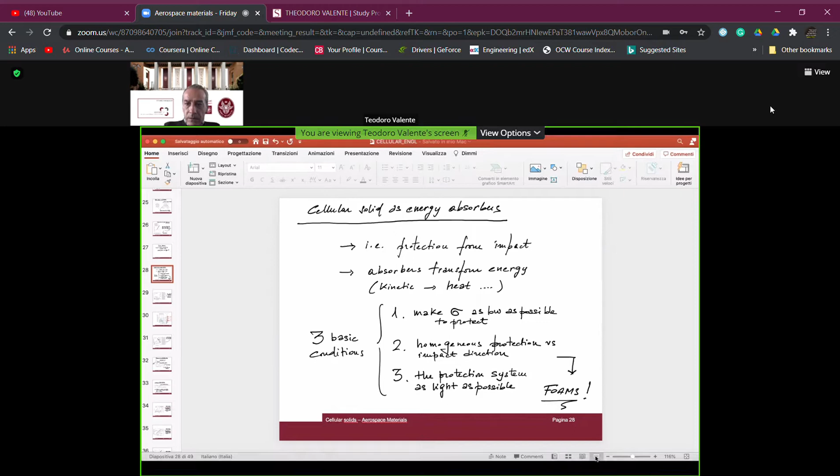And okay, so let's conclude the topic we are going to discuss related to cellular solids. We just started to talk about a possible application of this kind of material as energy absorbers. That means for protection, for example, from impact, and with the ability to transform absorbed energy, in this case kinetic energy, which is absorbed by the impacting mass, for example, to heat.

If we want to talk generally about the possibility to use a material as an energy absorber, we need to keep in mind three basic conditions which must be met. First of all, the structure, that is the material, must show a sort of homogeneous protection towards the impact direction, because we are not always in the condition to predict a defined impact direction. So this means that the behavior of the materials towards this kind of phenomena must be as homogeneous as possible. And this means that the microstructure of the material itself must not show, let me say, discontinuities, but must be the same in all directions. This is the first condition to be met.

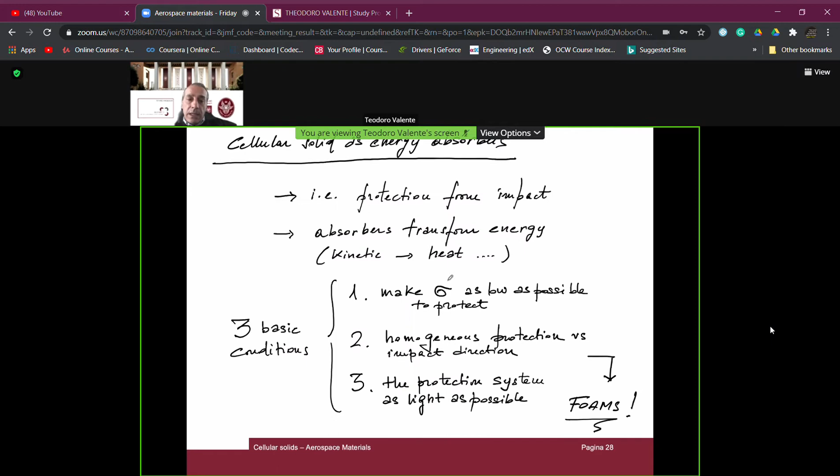And so we can match with this kind of materials also this condition, that is, make the stress transferred as low as possible. And thus all these three conditions, which are essential in order to identify materials suitable for energy absorbers, are matched by cellular solids. And this is a quite important and relevant field of application of this kind of materials. This is another example showing you, if you want to compare, the case of an elastic foam.

If you want to compare the energy absorbed per unit volume, remember that when we are talking about a stress-strain diagram, areas are energy, but they are energy per unit volume, okay? In the case of a fully dense elastic solid, and cellular materials having different values of density, like reported here, you see the top value is 0.3 according to our definition.

Well, if we are going to work by fixing the normalized peak stress, that is the maximum stress transferred, you see here, for example, the energy which can be absorbed by a fully dense, obviously elastic, solid. And then this energy is going to be increased when we move towards a higher value of mass density. But it's also very interesting, and most interesting I would say, having defined that the behavior of the cellular solid is much better than the fully dense elastic solid, to have a look here

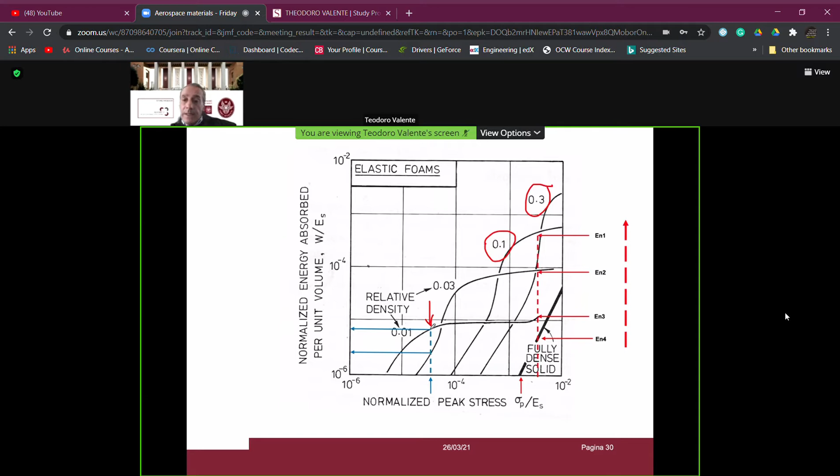to the blue line, for which we can see that we are able to transfer stresses to the background to be protected which are two orders of magnitude less than those we have in a fully dense elastic solid, by absorbing, for example, also higher values of energy. Thus, in this case, confirming what we have just said a minute ago.

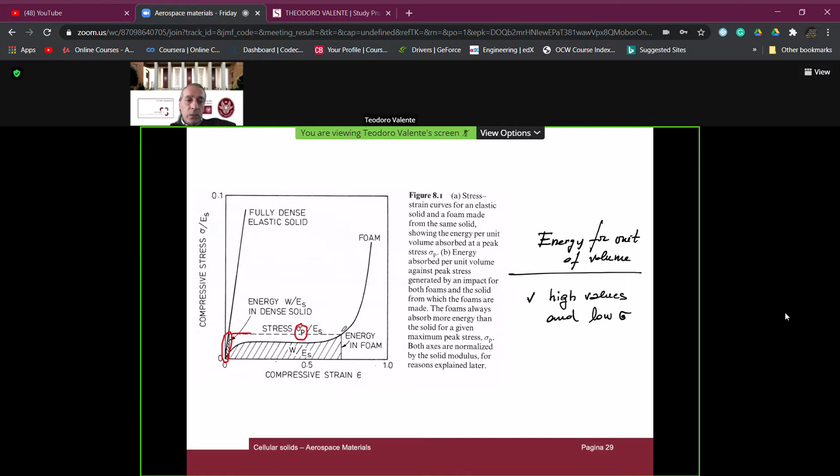Obviously, what is going to happen if we look to the stress-strain diagrams of the cellular solid is that these stress-strain diagrams for the same material can be parameterized, can have as parameter the mass density of the cellular solids. And if we are going to increase or decrease, depending on the point of view, the mass density of the cellular solids, we are also going to increase or decrease the maximum peak stress, which is that referred, for example, to the plateau, for which the stress is more or less, as we said last time, constant.

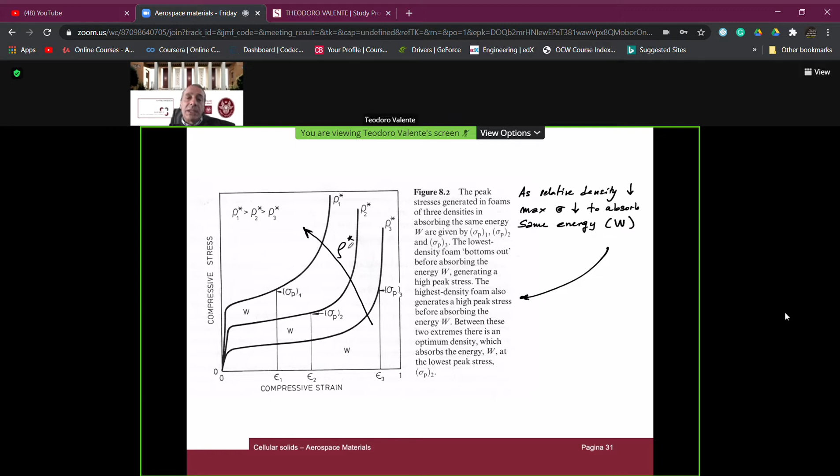Thus, the mass density is one of the design parameters in order to define properly, depending on the properties of the background, the maximum allowable stress when we use cellular materials for such kind of application. Are we able to calculate the energy per volume which is absorbed? Yes, the answer is yes, because that's just an integral of the diagram.

So this is the case, for example, for which we can define a constant value of the stress in the plateau. Then we have other contributions that can be added if we want to consider, in the case of open cells, also the work which is done by viscosity for fluid extraction when we have a compression applied on the material itself. And this is something which is very well known to you because it's related to fluid behavior,

as well as, if we want to define also the case of closed cells, like on these slides, we need to take into consideration not the fluid extraction, like in the case of the open cell, but the fluid compression inside the cells, having material not only on the edges but also on the faces. And also this is a work made by pressure: variation of pressure with reference to variation of volume, that is variation of deformation.

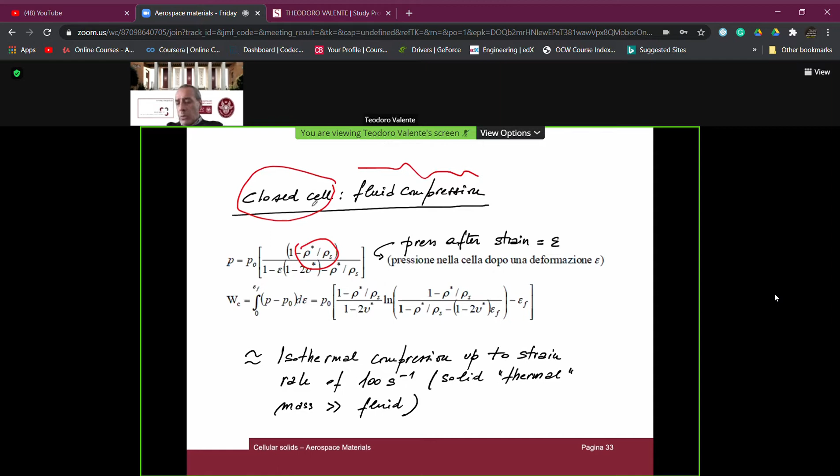And also in this case, we are able, very simply, if you know the geometry, obviously, and the geometry, I remind you, is linked to the ratio between the cellular solid density and the corresponding bulk material density, to make an analytical evaluation of the energy, remember, per unit volume, which can be absorbed, generally speaking, having a plateau, by considering if we want the work done by viscosity for fluid extraction or the work done for fluid compression in the case of closed cells. So we have all the analytic equations which let us make our calculation.

What is the procedure which is generally used in order to properly select, having defined a basic material, the mass density of the cellular solid which can match our design condition? Well, we have just said that the stress-strain diagrams are related to the mass density. As you see, when we increase the mass density in this way, we are going to increase the peak stress.

Another thing that we must consider is that the shape of this stress-strain diagram is not independent of the strain rate, since in this case we are discussing the impact behavior of the cellular solids.

So first of all, what is done, and this is able also to give to us as a result a graphic procedure, but if we want to make it analytically, we have the equation we have described before. We establish, or we analyze, depending on whether we have to do lab testing or we already have the data, the stress-strain diagram in compression, again, for a fixed value of the strain rate.

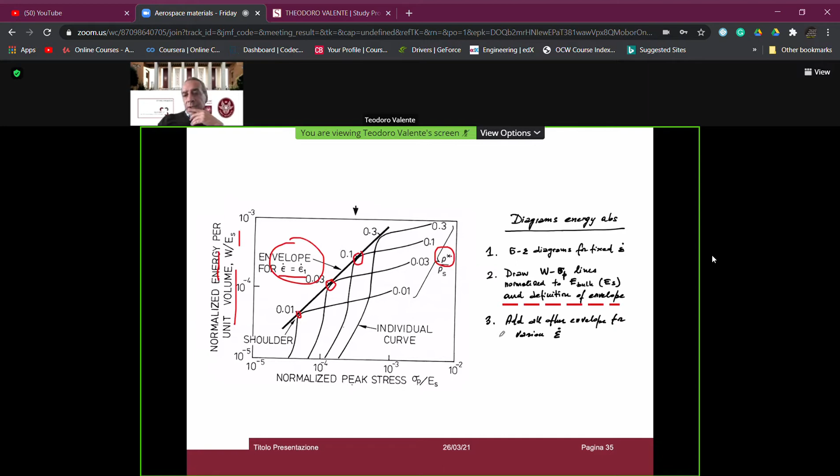Then we can move to the third step, because we have just described the first and second: we can add all the other envelopes for all the other values of strain rate. I mean, we have to repeat this procedure for another value of the strain rate, and so we can have this envelope, this is the first one, then the other envelope, this is the second one, and so on. Each one is related to a fixed value, as you see here, of the strain rate.

And then we have finished, because we have all three parameters on these diagrams, which let us define the mass density of the solid, depending on the normalized peak stress that we want and the energy per unit volume that we want to absorb. Again, I repeat, normalized to the bulk Young modulus, that is the Young modulus of the corresponding bulk material. And this is a graphical procedure.

Some of these graphs are reported for the most common cellular materials in specialized texts. So in some cases, we can use these diagrams directly to make our selection. That is, define the mass density of the cellular solid when we know that we have to absorb a certain quantity of energy for a defined value of strain rate with a maximum peak stress defined by design, which is the maximum stress considered allowable by the component, by the structure which must be protected.

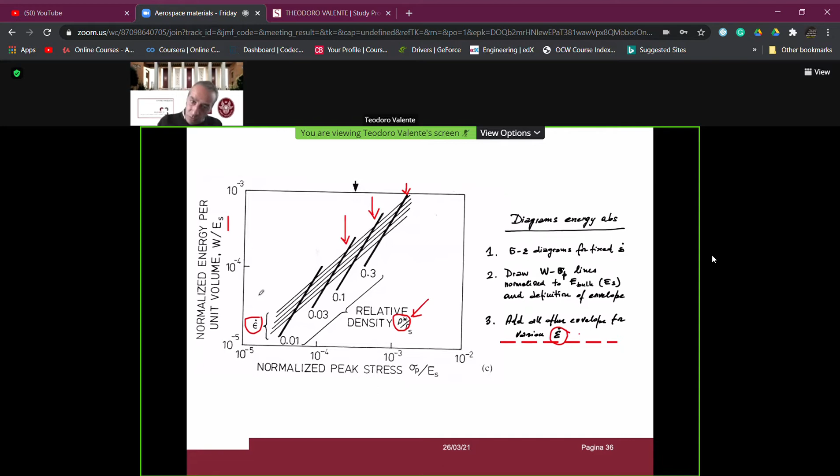Here you have some examples. This is related to some elastic foams, polyurethane or polyethylene, like in this case. And you see here, this is defined for this value of strain rate and for a defined value of temperature, because in many cases, especially for polymeric materials, temperature is able to activate different behavior. And these are the experimental data. This is the first envelope that we define, and this is the case of an elastic foam.

This is a case of a plastic foam, that is a cellular material for which we have to consider as peak stress the maximum stress for the yielding of the material itself. And thus we have final diagrams like those I showed to you. This is for polyurethane foams, elastomeric foams, and you see here, depending on the relative density and the value of the strain rate, we have the whole relationship between the energy which can be absorbed per unit volume and the corresponding peak stress.

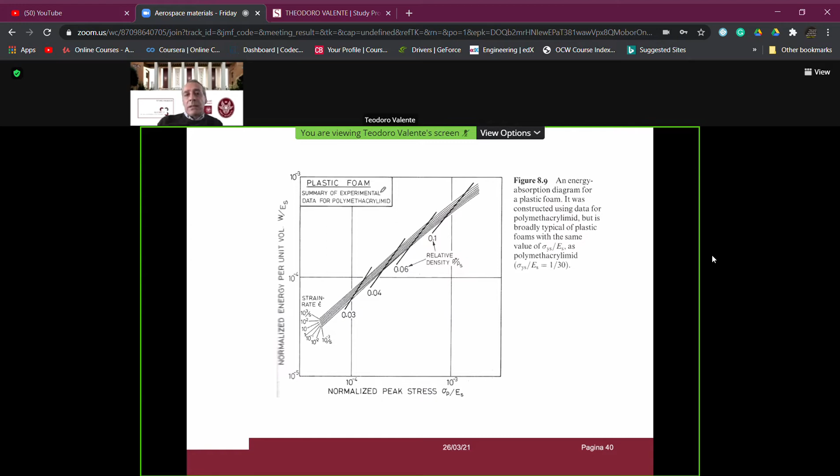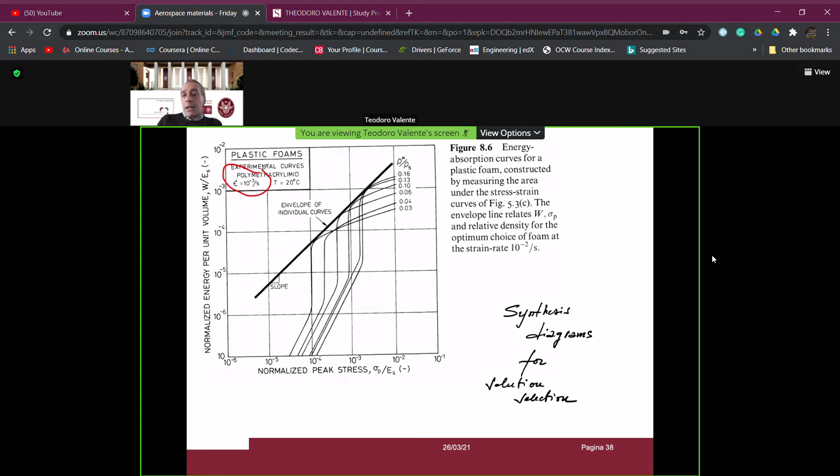And this is the case of the plastic foam related to the polymethacrylimid, which is the same material to which this diagram refers. Obviously, diagrams of this type have been done with different values, not only 10 to -2, of strain rate, with velocity, which is going to characterize the impact on the material itself.

Let's have a look very shortly if it works. What is going to happen here is not going to work. Of a demonstration. Why? Let me see. Oops, because I have a pen, perhaps it's for this. Yeah, a demonstration on how, also experimentally and visually, I would say, these kinds of materials are effective. Okay, let's have a look.

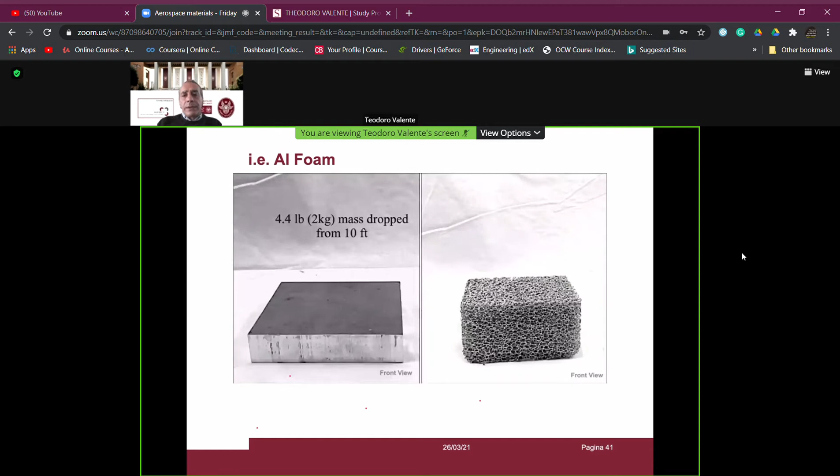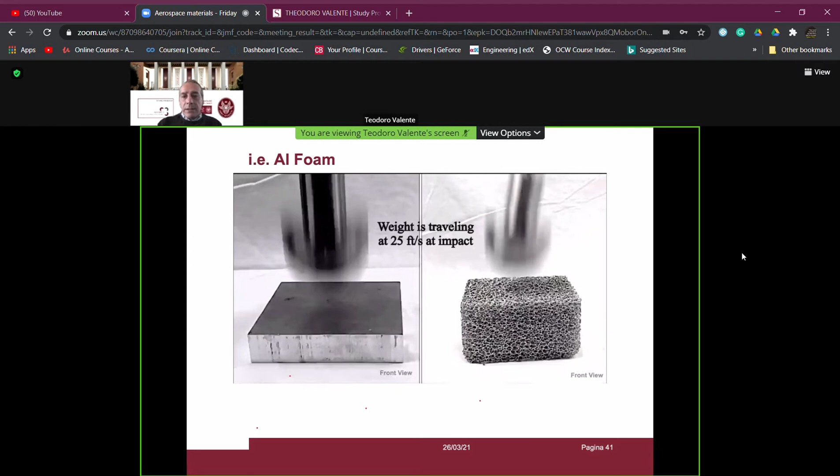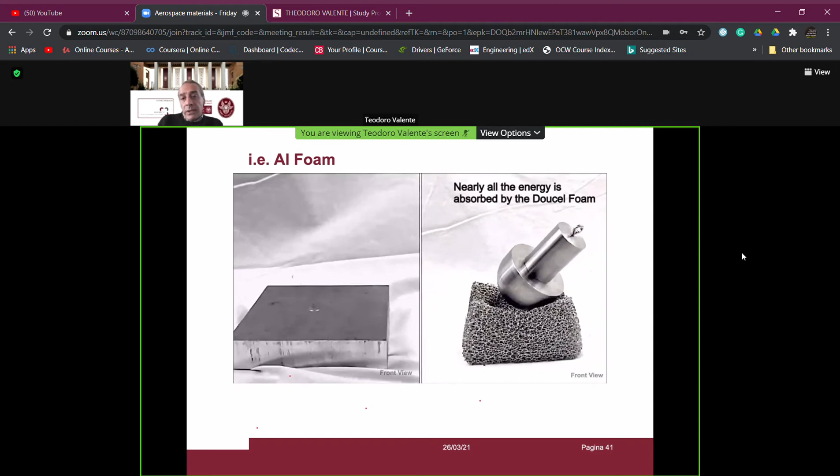That's the case of an aluminum foam compared with a solid aluminum, where we have a 2 kilogram mass impacting. You see, this is the behavior compared of the bulk on the left side and of the foam on the right side. In this case, we have defined the velocity, we have defined the mass of the impacting material, that is the energy, and you see that nearly all the energy is absorbed by the foam in the right case. Meanwhile, the solid aluminum block causes the impacting mass to bounce.

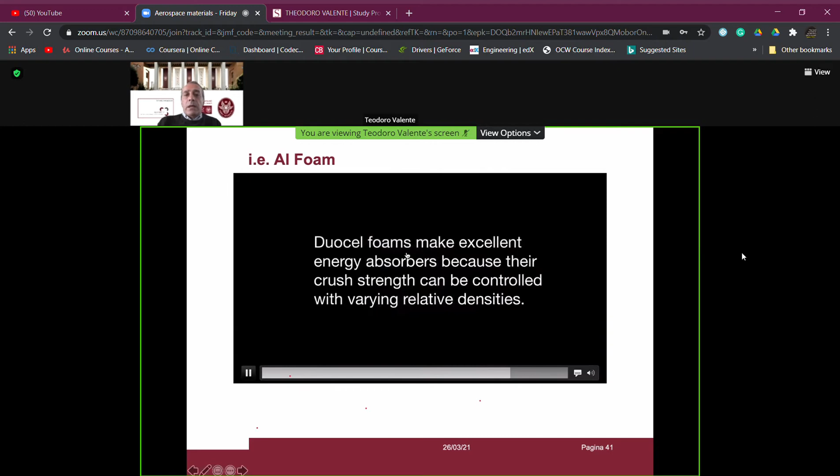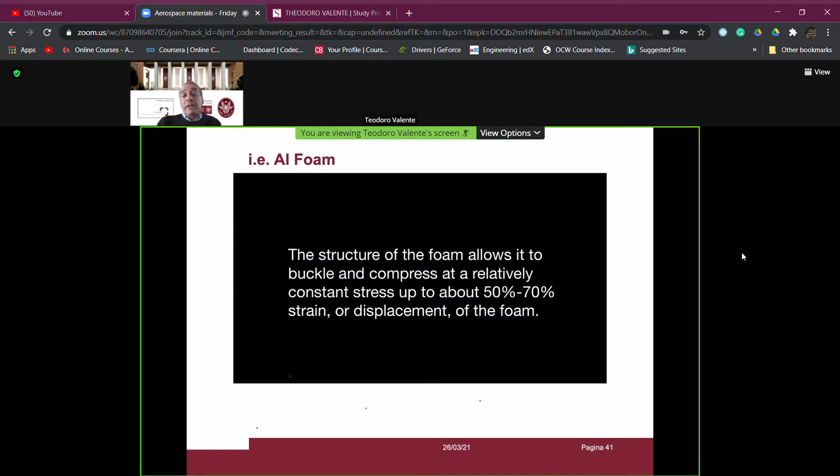In this case, for a defined distance, but you see that the impacting mass does not lose most of its kinetic energy. This means that the solid aluminum is not going to absorb a relevant part of the energy. You see here, it stops. So energy is absorbed. And this kind of foam, in this case specifically, just to give you an example, I repeat, is aluminum, is very, very effective and is generally speaking more effective than the corresponding solid material.

So these are also experimental tests which are made in order to understand the behavior of different types of foams with different types of cells and with different types of basic materials. Just to conclude today, let us remember another thing. This is just for you to remember something that you already should know.

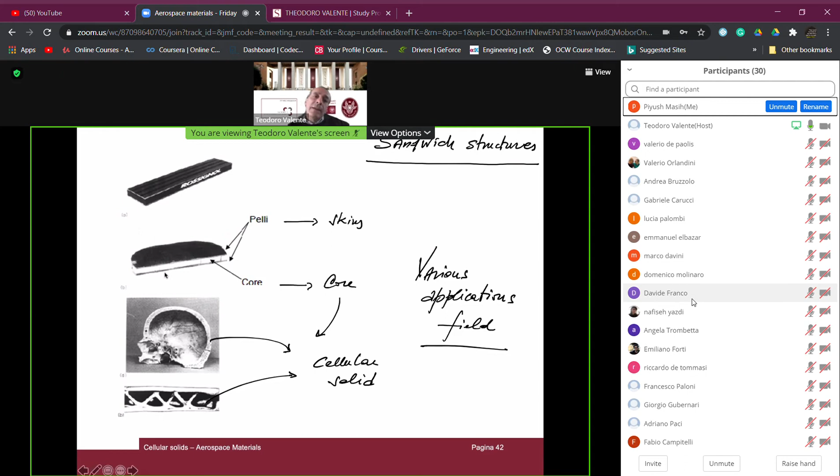And there is also another important concept that you should remember: for a defined applied load on this system, the maximum value of the stress on the upper skin and on the lower skin depends on the moment of inertia of the material itself, and that depends on the distance between the upper skin and the lower skin.

So we can make the suitable distance by using light materials, that is the core, using cellular materials, which allow us to have a composite structure, because this is finally a composite structure which is light and which is able to withstand the maximum values of stresses, which are localized on the upper skin and on the lower skin, these being made by high-performing, high-resistance composite materials.

And in the case of the sandwich structure, just to remind you, I repeat, this is just a recall, very often we need to design the system in order to match a minimum value of the weight of the beam.

And here you have the basic equations that I used in order to define the equivalent shear stiffness, the equivalent flexural, that is bending stiffness, and the deformation at the center of the beam if we apply, for example, a centered load named P. And thus, if we want to minimize the weight of this system, having defined the maximum allowable deformation for a given load P,

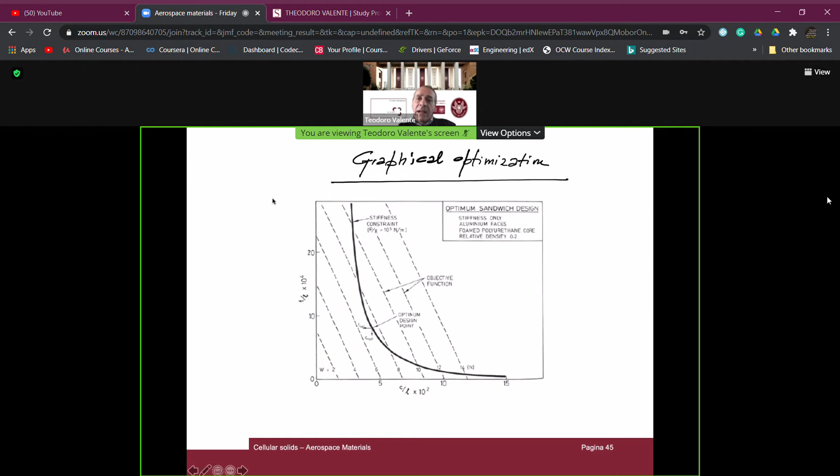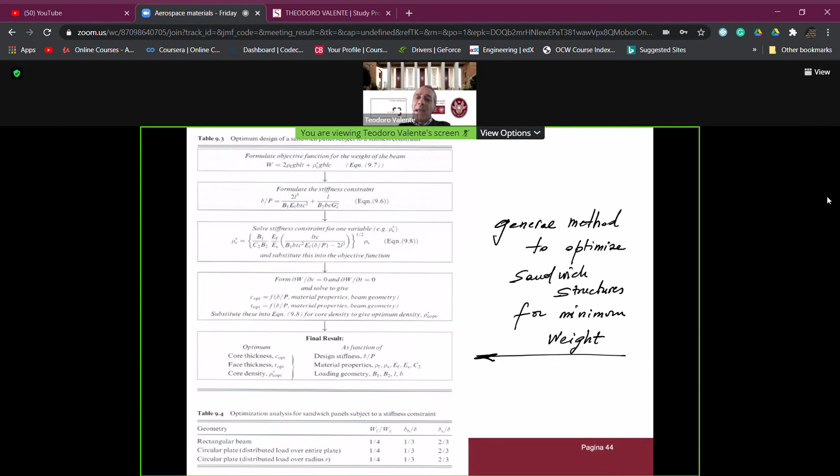But I would say to you that these simple equations can also allow us to make a very simple calculation in case we want to define the general method to optimize our sandwich structure in order to match a minimum weight, having defined, obviously, some design parameters, like for example the width B of the beam,

the total length L of the beam, the type of materials that we want to use as core, that is the mass density of these materials, and then the maximum deformation we can tolerate in the center, which is another design parameter, when we apply, for example, a concentrated load, which is the force P.

Obviously, this can be repeated also in the case we do not have a concentrated load. We will have other formulas, which are the basic formulas of these composite structures, in the case we have a distributed load on the beam, or a combination of these two, let me say, extreme cases.

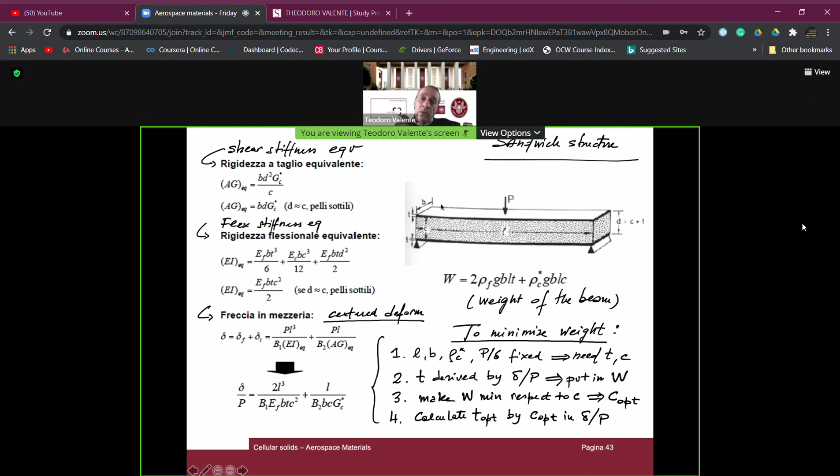Just remember, and I want to recall to you that when we are talking about sandwich structure, we need to make also some specific checks in terms of the possibility to have different failure modes, because these kinds of structures, which are composite structures, can have, generally speaking, different failure modes; obviously that depends on the base materials. I just mentioned to you the most common case, in which the upper skin and the lower skin are made of polymeric matrix composites, but we can have also applications in which the upper skin and the lower skin are metallic alloys, for example aluminum alloys, to stay in our field of aerospace materials and structures.

What is going to change? If we are thinking of metallic alloys as upper skin and lower skin, obviously we are dealing with skins made of materials which can show yielding. So one possibility, if we apply the load in this way, remember that we have compression on the upper skin and tensile stresses on the lower skin, is to have, for example, yielding of the material. So face yielding is one of the possible failure modes, in case we use ductile materials for the skins.

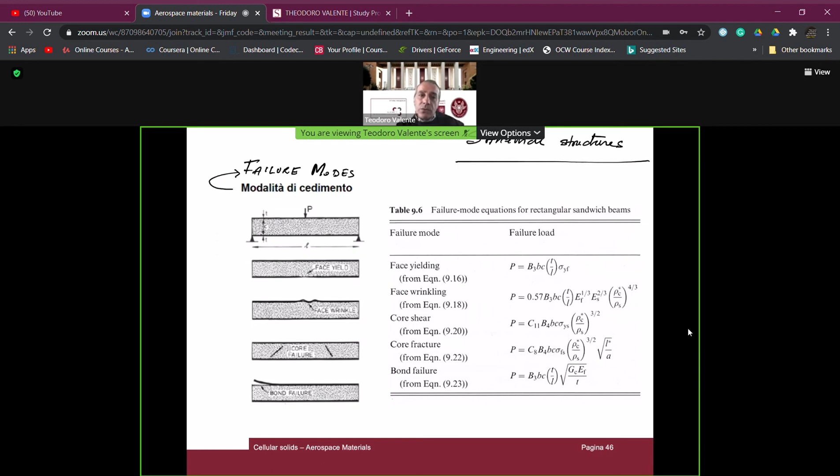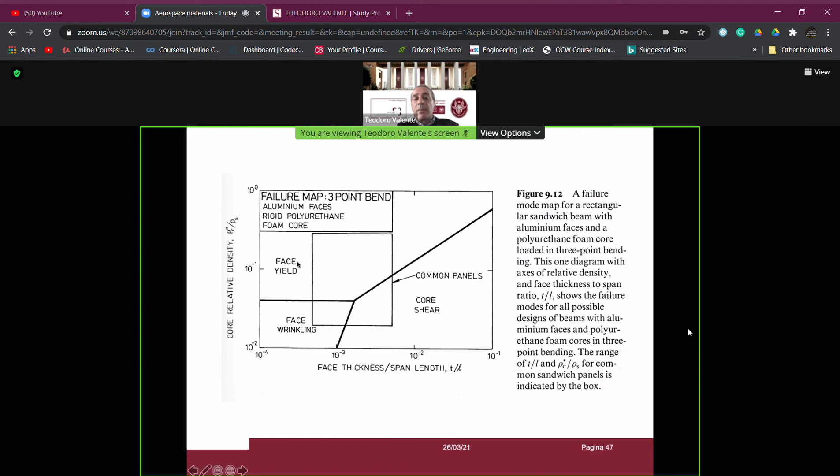One sandwich, just to close the discussion of today: we can have also some failure map. You see here, aluminum face. This is a case in which yielding we must consider, and so for each kind of sandwich configuration, we can draw up by experimental data, obviously, also by using theoretical, if we want, a failure map in which the mechanism of failure is evidenced as the critical mechanism of failure.

One example, just moving to sport, of using sandwich structure is in ski. Not professional ones, because professional skis for race are laminated, but for less sportive people, not athletes, most of the time they are made by an upper skin, a lower skin, and a foamed material, which is usually a polymeric base, that is polyurethane foam. So in this case, the equations that we have defined before are used.

Instead, if you are talking about professional skis for racing, they are made of laminated wood. They are made one by one. In this case we need to characterize each of the fabricated skis, because due to the manual operation during fabrication it's quite difficult to have a complete reproducibility of the behavior of the assembled ski. So we need to make a characterization, for example, in bending behavior of the materials itself.

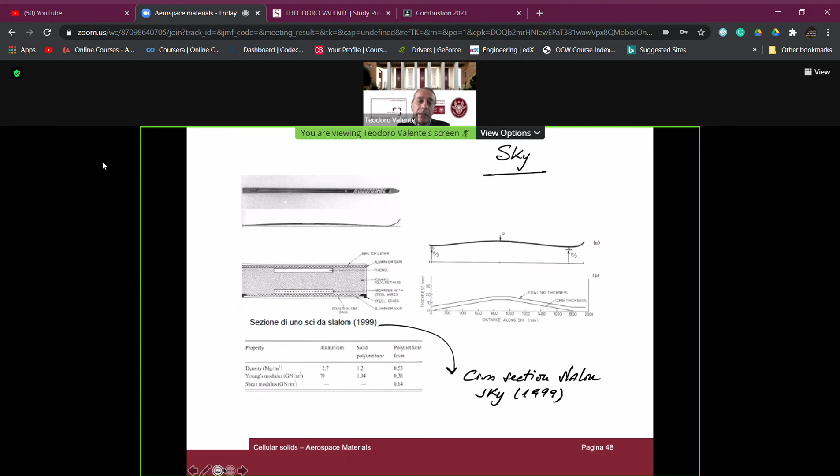But this is just for your curiosity about racing skis. When we talk about more conventional, more commercial skis, we have another application of the sandwich structure, and thus another very diffused commercial application of cellular materials, which are put inside the skis, and which is most of the time a polyurethane foam, a polymeric foam, since these apparatus are essentially designed to resist bending stresses, which are the main stresses to which sandwich structures are dedicated.

With this, we have finished the lesson of today. Next time, that is next Monday, we will start to talk about another, I would say, non-conventional class of materials, which are materials used for the fabrication of radar absorbing systems, for example.